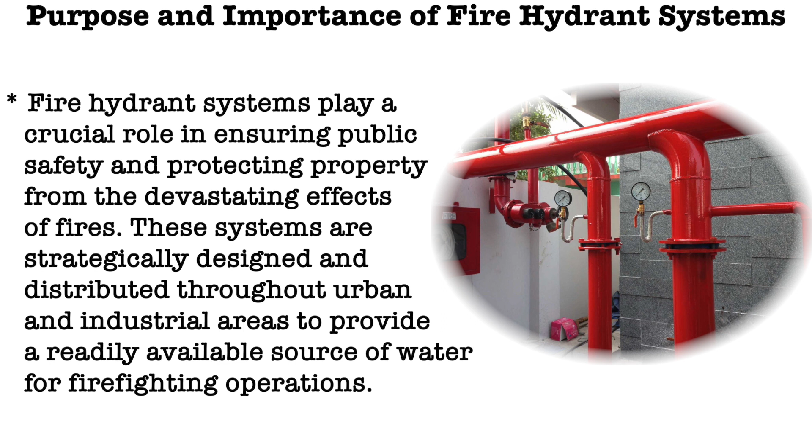Purpose and importance of fire hydrant systems. Fire hydrant systems play a crucial role in securing public safety and protecting properties from the devastating effects of fires. These systems are strategically designed and distributed throughout urban and industrial areas to provide a readily available source of water for firefighting operations. We will discuss the purpose and importance of fire hydrant systems in more detail.

First, immediate access to water. One of the primary purposes of a fire hydrant system is to provide immediate access to a substantial and pressurized water supply. This quick access to water is vital during the early stage of a fire when every second counts. Firefighters can connect their hoses to the hydrant, allowing them to readily suppress flames and prevent the fire from spreading further.

Second one is support for firefighting operations. Fire hydrants are critical tools for firefighters, serving as a key component in fire suppression strategies. They ensure a dependable and consistent water supply, allowing firefighters to focus on extinguishing fires rather than worrying about securing water sources. This can significantly enhance the effectiveness and efficiency of firefighting efforts.

Third one is supplementing fire suppression systems. While many buildings are equipped with their own fire suppression systems, such as sprinklers, these systems may not always be sufficient to control a large fire. Fire hydrant systems serve as a backup water source, providing additional water volume and pressure when needed.

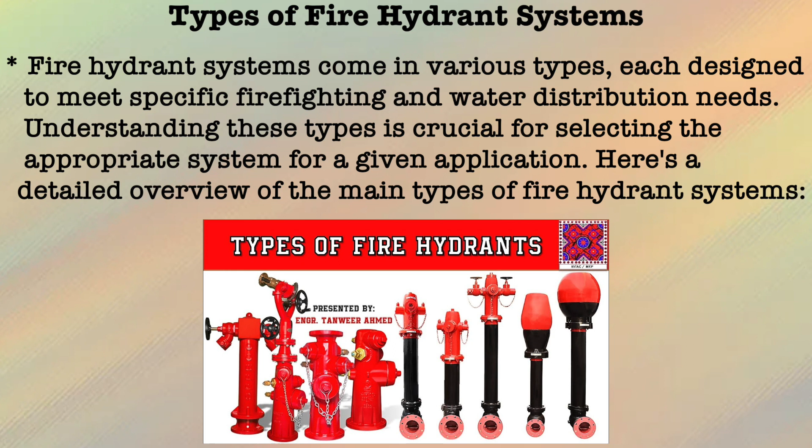And further we will move on to the types of fire hydrant systems. Fire hydrant systems come in various types, each designed to meet specific firefighting and water distribution needs. Understanding these types is crucial in selecting the appropriate system for a given application. Here is a detailed overview of the main types of fire hydrant systems.

Wet barrel hydrant. Wet barrel hydrants are among the most common types of fire hydrant. They are called wet because water is always present in the barrel just below the frost line. These hydrants are typically found in regions with milder climates where freezing is not a significant concern. Water remains inside the hydrant at all times. Easy access to water as there is no need to open valves to release water. Suitable for areas with low freezing risk.

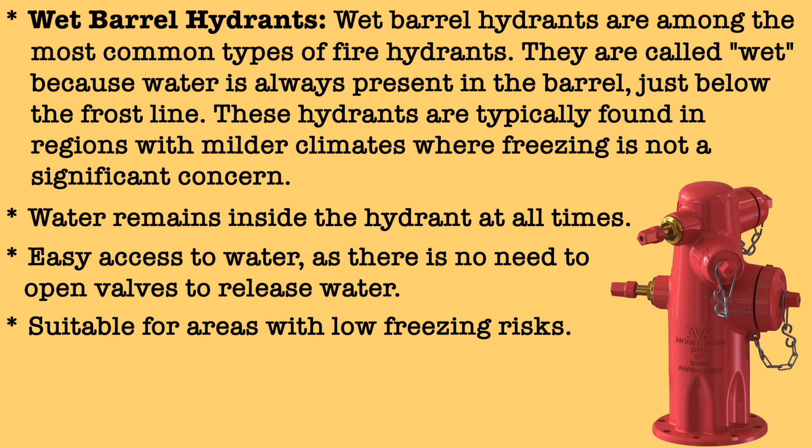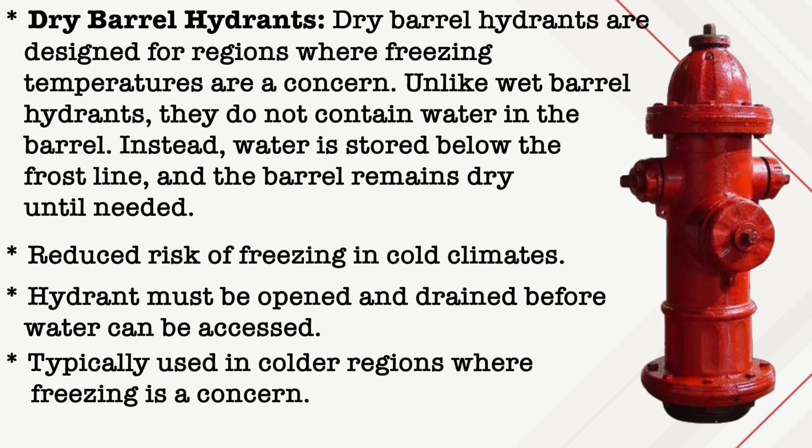Second one is dry barrel hydrant. Dry barrel hydrants are designed for regions where freezing temperatures are a concern. Unlike wet barrel hydrants, they do not contain water in the barrel. Instead, water is stored below the frost line and the barrel remains dry until it is needed. The key features of dry barrel hydrants are reduced risk of freezing in cold climates. The hydrant must be opened and drained before water can be accessed, and it is typically used in colder regions where freezing is a concern.

Private hydrant. Private hydrants are installed on private properties such as industrial complexes, shopping centers, or large facilities. They are not part of the public water supply system and are maintained by the property owner. Its key features: a dedicated water supply for specific properties or facilities, property owners are responsible for maintenance and compliance, and they are often used in industrial and commercial settings.

Next one is public hydrant. Public hydrants are part of a municipal water supply system and are owned and maintained by the local water authority or fire department. They are typically located along streets and in public areas for use by the fire department. The key features of public hydrants: they are part of the public water distribution system, regularly inspected and maintained by municipal authorities, and available for use by firefighters and authorized personnel.

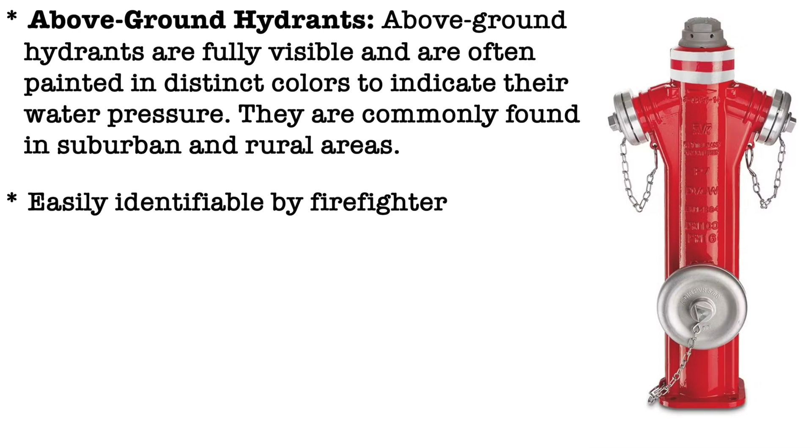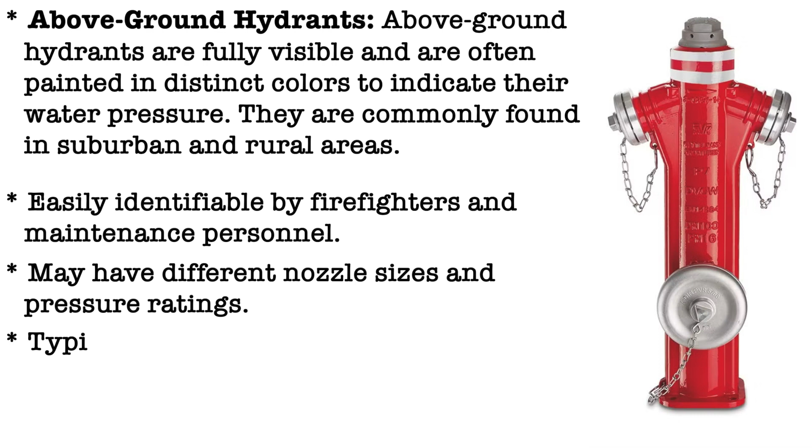Above ground hydrants. Above ground hydrants are fully visible and are often painted in distinct colors to indicate their water pressure. They are commonly found in suburban and rural areas. Their key features: easily identifiable by firefighters and maintenance personnel, may have different nozzle sizes and pressure ratings, and typically found in areas with lower population density.

Various components of fire hydrant systems.

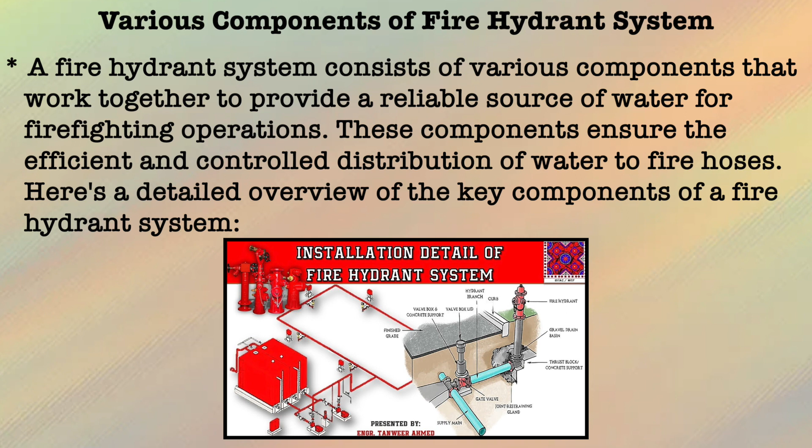First, a fire hydrant system consists of various components that work together to provide a reliable source of water for firefighting operations. These components ensure the efficient and controlled distribution of water to fire hoses. Here is a detailed overview of the key components of a fire hydrant system.

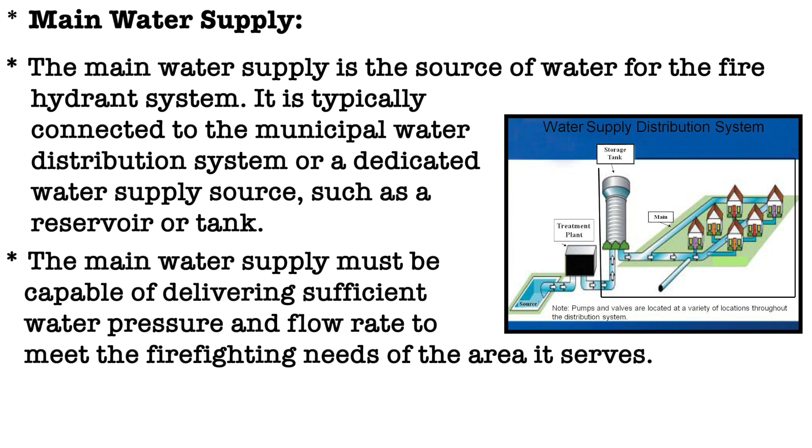First one is the main water supply. The main water supply is the source of water for the fire hydrant system. It is typically connected to the municipal water distribution system or a dedicated water supply source such as a reservoir or tank. The main water supply must be capable of delivering sufficient water pressure and flow rate to meet the firefighting needs of the areas it serves.

Second one is hydrant body. Hydrant body is the main structure that houses the internal components of the fire hydrant. It is typically made of durable material such as cast iron or ductile iron to withstand environmental conditions and physical stress. The hydrant body is usually painted in a distinct color, for example red or yellow, to make it easily visible for firefighters and maintenance personnel.

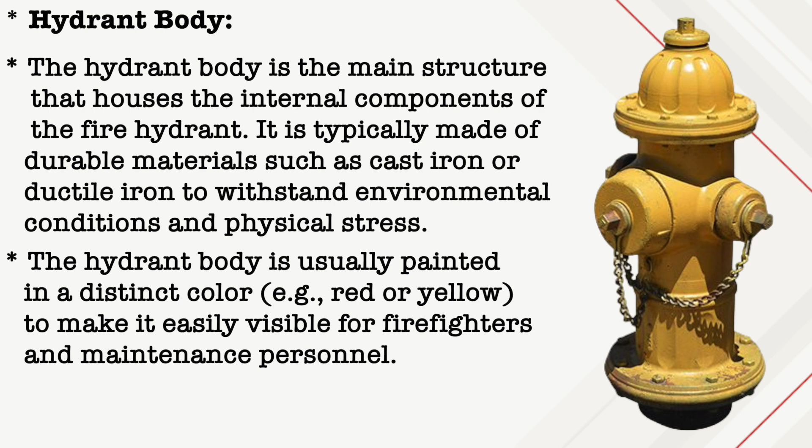Hydrant nozzle and couplings. The hydrant nozzle is an outlet through which water is discharged from the hydrant. It is designed to accommodate fire hoses and nozzles securely. Hydrant couplings are standardized connections that allow firefighters to attach hoses to the hydrant nozzle quickly. The size and type of nozzle and couplings may vary depending on local standards and the intended use of the hydrant.

Operating valve. The operating valve is a key component that controls the flow of water through the hydrant. It is typically located within the hydrant body and is operated from the exterior. There are two main types of operating valve: the main valve and the drain valve. The main valve controls the flow of water to the nozzle, while the drain valve is used to release water from the hydrant when it is not in use, preventing freezing in dry barrel hydrants.

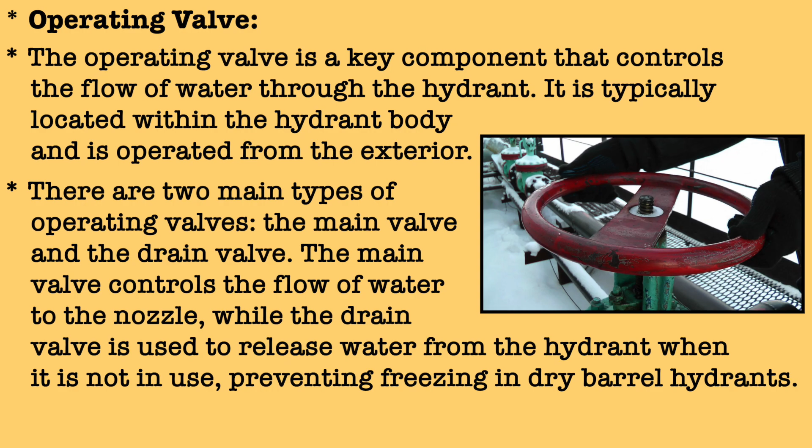The fifth part of this is hydrant marking and signage. Fire hydrants are often marked with specific information to provide essential detail to firefighters and maintenance personnel. Common markings include the hydrant's flow rate, pressure rating, and the distance to the main valve. Signage may also indicate the direction of water flow and the type of hydrant, for example wet barrel or dry barrel.

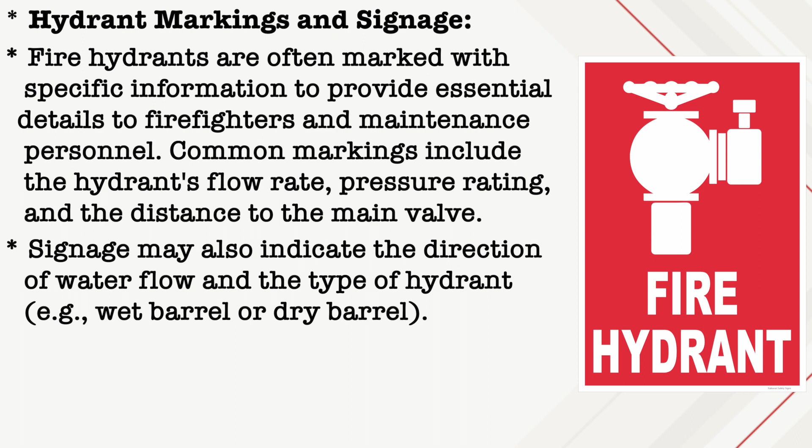Hydrant accessories. Various accessories may be installed on or near the fire hydrant to enhance its functionality. These may include hose cap and chain to protect the nozzle and keep it clean when it's not in use; hydrant wrenches and tools for operating and maintaining the hydrants; traffic markers and reflective tape to make the hydrant visible to drivers and emergency responders, especially in low light conditions; and locking mechanisms to prevent unauthorized use or tampering with the hydrant.

Pressure reducing valve. It's optional. In some cases, pressure reducing valves may be installed on fire hydrants to control the water pressure delivered to the nozzle. These valves are particularly useful in areas with high water pressure to prevent hose damage and excessive water discharge.

Understanding these components and their function is essential for the proper installation, operation and maintenance of a fire hydrant system. Regular inspection and maintenance are crucial to ensuring that the components are in working order and the system is ready to provide an immediate and reliable source of water for firefighting purposes when needed.

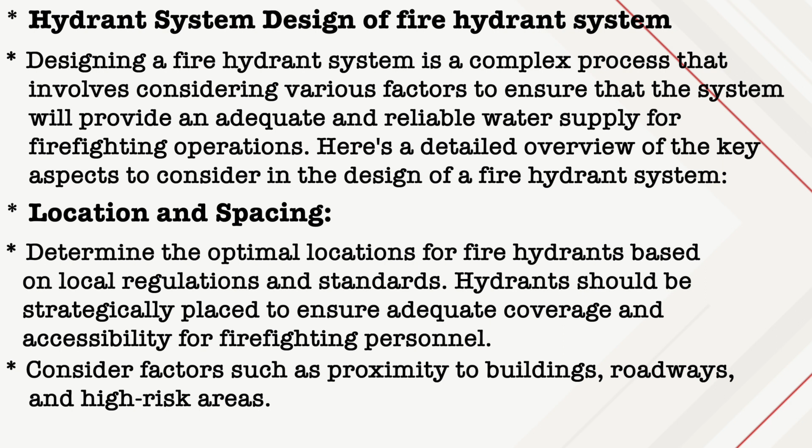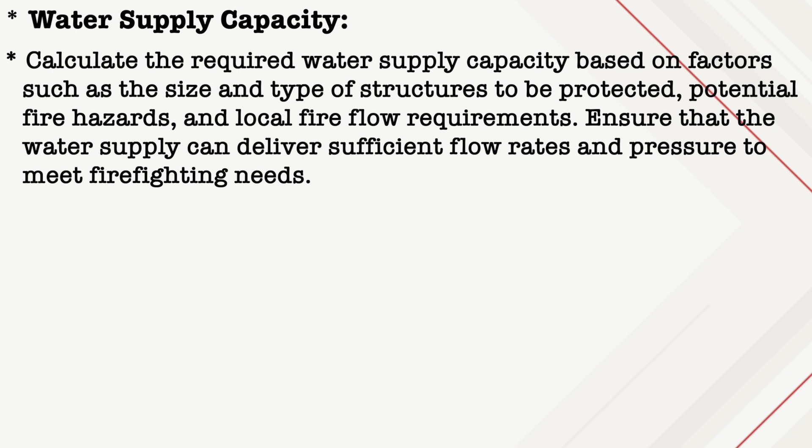Second one is water supply capacity. Calculate the required water supply capacity based on factors such as the size and type of structures to be protected, potential fire hazards, and local fire flow requirements. Ensure that the water supply can deliver sufficient flow rates and pressure to meet firefighting needs.

Third one is pipe sizing and layout. Design the water distribution network, including the underground piping that connects the hydrant to the water supply sources. Pipe sizing should account for friction losses, elevation changes and system demand. Lay out the pipe in a grid or network that provides even coverage and minimizes dead end sections.

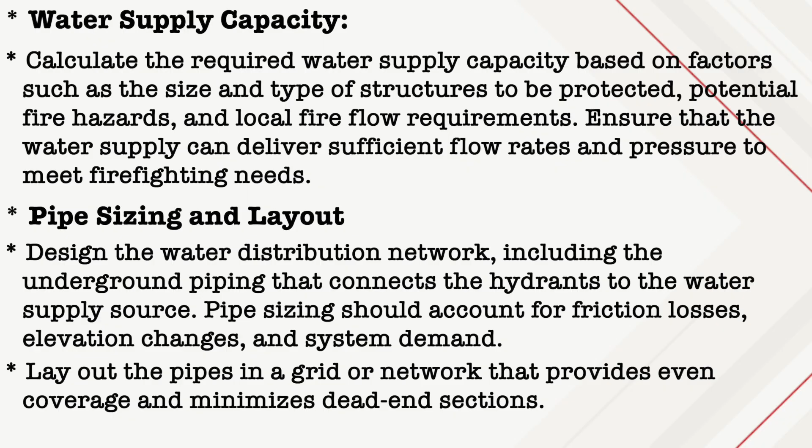The fourth one is pressure requirement. Determine the minimum and maximum allowable operating pressure for the hydrant system. Pressure requirements can vary based on local regulations and the needs of the fire department. Use pressure reducing valves if necessary to control high water pressure and prevent hose damage. Fifth one is backflow prevention.

Implement backflow prevention measures to ensure that contaminated water does not enter the public water supply through the fire hydrant system. This is critical to maintain water quality and public health. Install backflow prevention devices such as backflow preventers and check valves at appropriate locations.

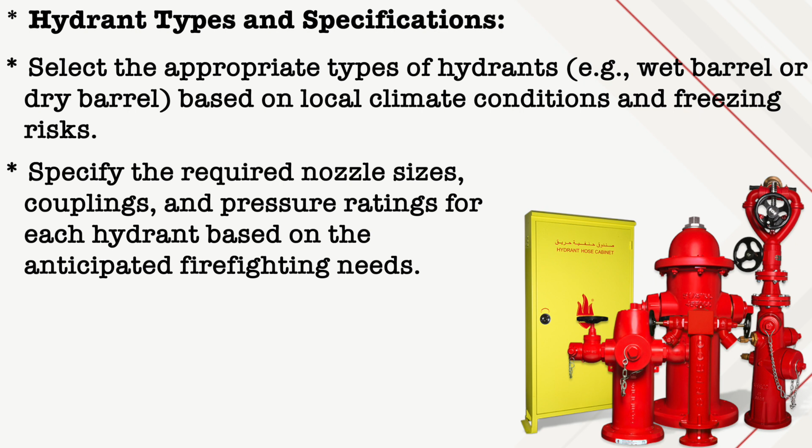Sixth one is hydrant type and specification. Select the appropriate type of hydrant, for example wet barrel or dry barrel, based on the local climate conditions and freezing risk. Specify the required nozzle size, coupling and pressure rating for each hydrant based on the anticipated firefighting needs.

Seventh one is accessibility and clearance. Ensure that the fire hydrants are easily accessible to firefighting equipment such as fire trucks. Maintain clearance around hydrants to allow unobstructed operations and visibility. Consider local regulations regarding hydrant clearance and visibility requirements.

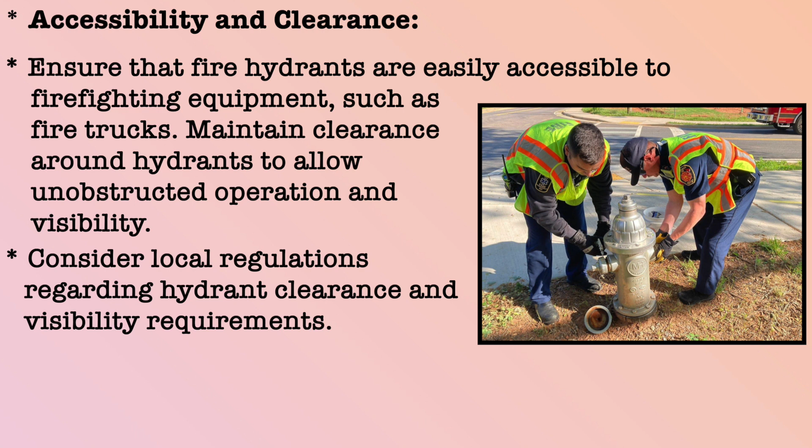Eighth one is traffic consideration. Evaluate traffic flow and road design near hydrant locations. Implement traffic management measures such as reflective markers and signage to prevent obstruction of hydrants. Ensure that the hydrants do not impede emergency vehicle access.

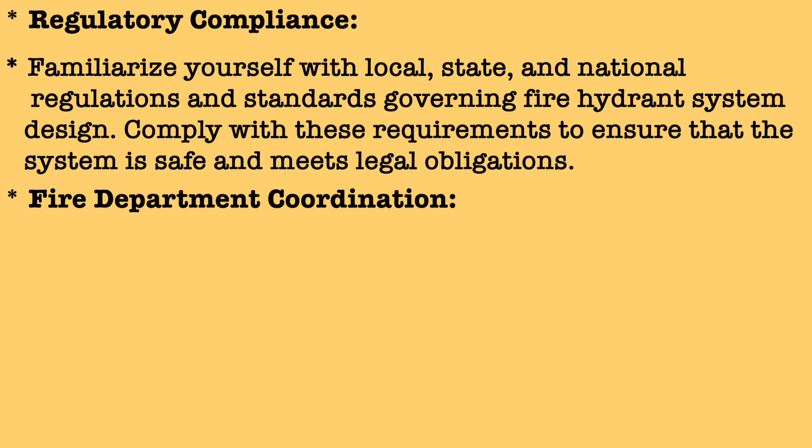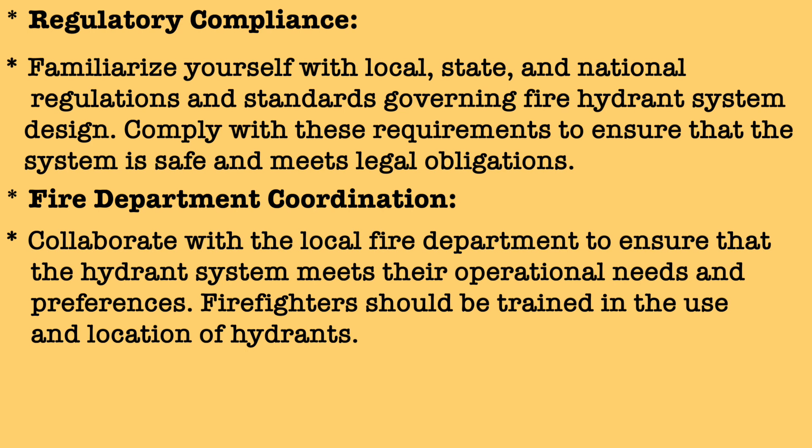Regulatory compliance. Familiarize yourself with local, state and national regulations and standards governing fire hydrant design. Comply with these requirements to ensure that the system is safe and meets legal obligations. Fire department coordination. Collaborate with the local fire department to ensure that the hydrant systems meet their operational needs and preferences. Firefighters should be trained in the use and location of hydrants.

The last one is testing and commissioning. Conduct thorough testing and commissioning of the hydrant system before it is put into service. This includes flow testing, pressure testing and ensuring that the components operate as intended. Documentation and record keeping. Maintain detailed records of the hydrant system design, installation, testing and maintenance activities. These records are essential for ongoing system management and compliance.

Future expansion and upgrades. Consider the potential need for system expansion or upgrades as the area develops or fire protection requirements change. Plan for future expansion and flexibility in system design. The design of a fire hydrant system requires careful consideration of these factors to ensure that the system is capable of delivering an immediate and reliable water supply for firefighting purposes. Collaboration with relevant authorities throughout planning and adherence to best practices and regulations are essential for a successful hydrant system design.

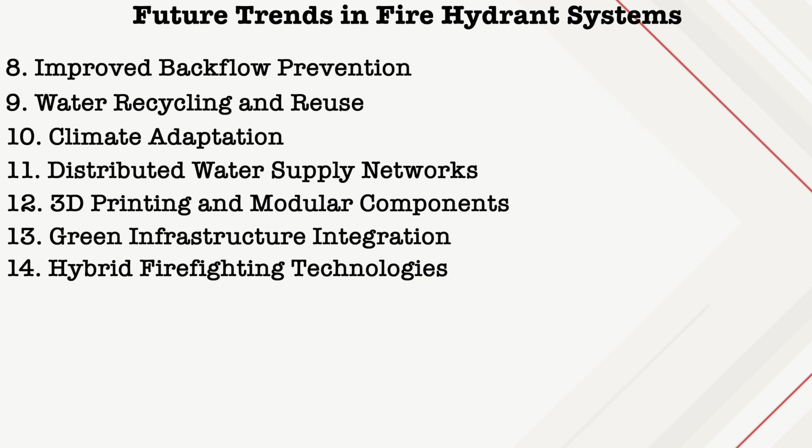Next is enhanced materials and corrosion resistance, energy efficient systems, hydraulic modeling and simulation, automatic flow testing, improved backflow prevention, water recycling and reuse, climate adaptation, distributed water supply networks, 3D printing and modular components, green infrastructure integration, hybrid firefighting technologies, and training and simulations. These future trends in fire hydrant systems aim to address evolving challenges, enhance system performance and promote sustainability in firefighting infrastructure. The integration of smart technologies, improved materials and innovative design concepts is expected to contribute to more effective fire protection and emergency responses.

In closing, it is evident that fire hydrant systems are not just an unassuming fixture on your street. They are the unsung heroes of fire protection and emergency response. Throughout this presentation, we have explored the purpose and types, components, design considerations, maintenance, and future trends of fire hydrant systems. It is crucial to remember that fire hydrants are not mere utilities but lifelines during emergencies. They stand as silent sentinels, ready to deliver the life-giving force of water when the need arises. Their importance cannot be overstated, as they are the linchpin of effective firefighting, helping us safeguard lives, properties, and the environment.